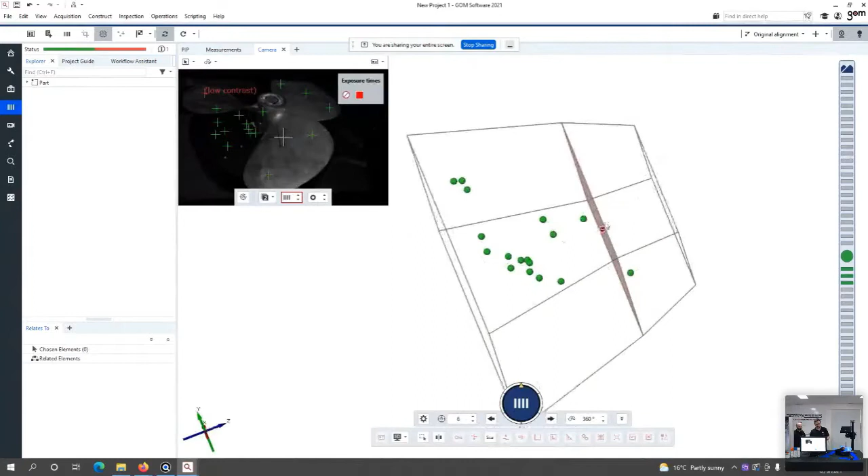Okay, so we can see these green dots within the measurement volume. These are reference points that have been applied to the surface of the component. This will help us keep track of where the measurements are positioned relative to each other. And it will also help us for the second stage of the scanning process, which is marrying the first side to the second side based on the common reference points that we'll be seeing.

Okay. So for the scanning today, we're scanning this propeller. This is a very worn and beaten up propeller. So this is for a maintenance repair application. But what we're really going to be doing with the scan data, once we've created the digital twin, is reverse engineering it and creating a CAD model which is going to be used for production. We'll talk a little bit more about that at the end, but right now we're going to jump straight into it. So within the software here, I've got this workflow assistant.

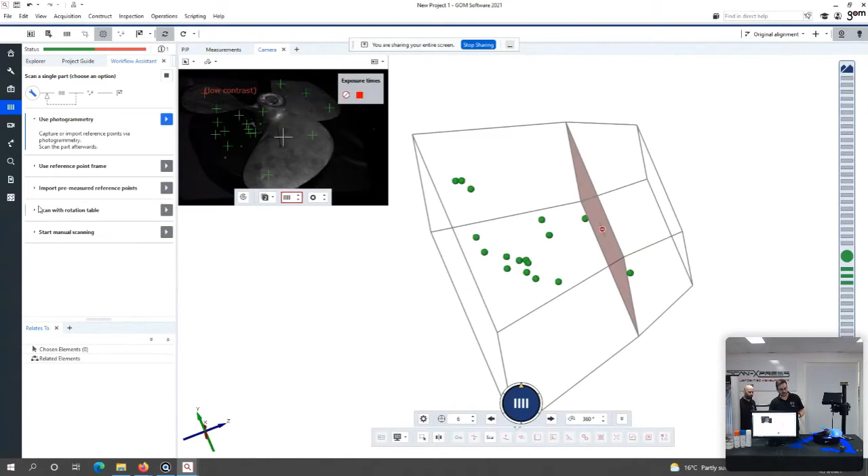And the workflow assistant basically guides us through how to scan if we're a little bit unfamiliar. But I can just start here scanning with rotation table. So I'm going to click that. Choose the measurement temperature. I've got it set to 6 measurement positions, which is good. Yep, perfect. 20 degrees in here. Nice temperature control. Perfect, 20 degrees, that's right.

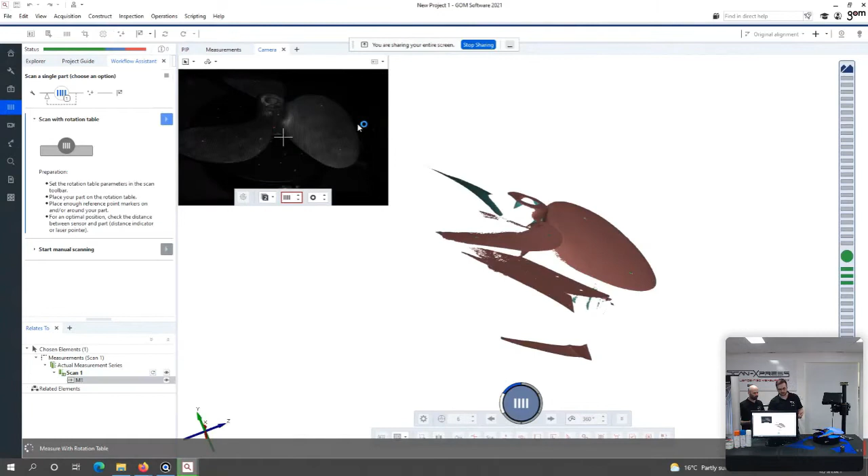Lovely. So what's happening at the moment is the scanner is projecting a pattern across the surface of the part, which the left and right cameras are looking at and triangulating, and this builds up our 3D surface map. So we can see that's the first patch of data that we've collected. The ROT 350, which we've got connected to the computer as well, rotates between each measurement, so that provides a semi-automated setup where we don't actually have to do much intervention. So while that's happening, we can see the data being built up on the screen.

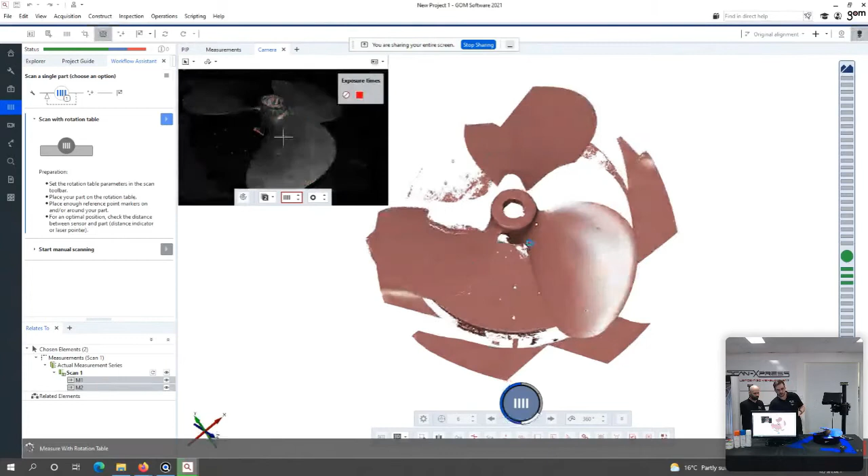What we will have to do after we finish capturing these first 6 measurements is delete the background data. So what we can see at the moment is that the scanner is capturing everything. We can see it's capturing the propeller, which is the region of interest for us. We're also capturing the rotation table, the ROT 350, which is rotating, as well as the background, the table the ROT 350 is sitting on. Okay.

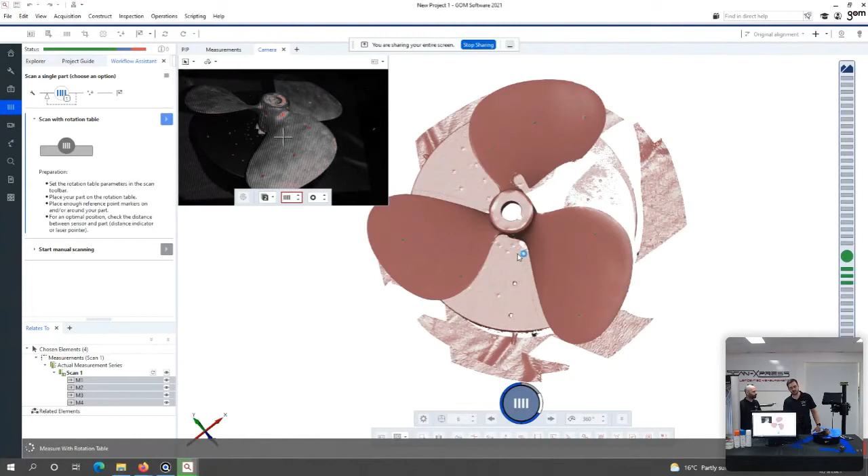But as we mentioned, this is for production application. So we're going to be reverse engineering to create a CAD model. And this CAD model can be read by any manufacturer for any sort of manufacturing application. Could be 3D printed. A little teaser for what's coming up.

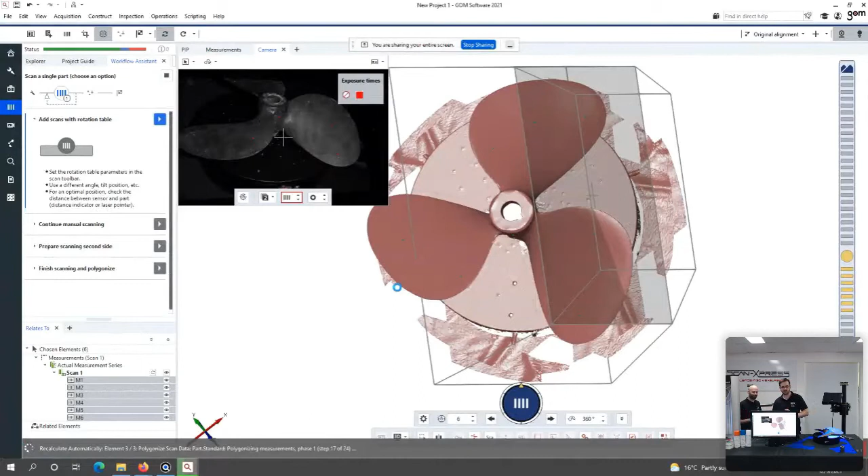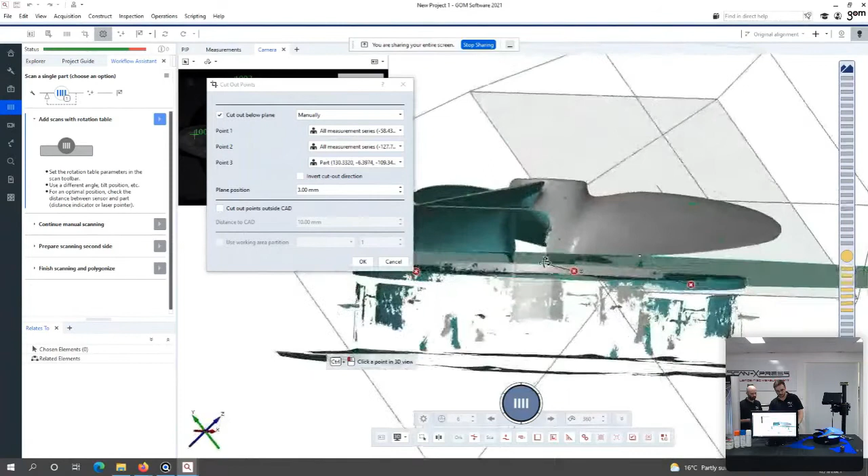Okay, so we can see here we've captured the first set of data from this first side. It's nice clean data. So what we're going to do now is delete the background. So I'm going to come up here and say cut out points. Okay, and I'm going to say cut out below plane. I'm just going to define 3 points in the rotation table to define that plane. We can just have a quick check to make sure that that's good. And looks pretty good. So what we're saying is that anywhere from that plane down, we're not going to accept the data and the measurements that we've just captured. Excellent. So we're going to do that.

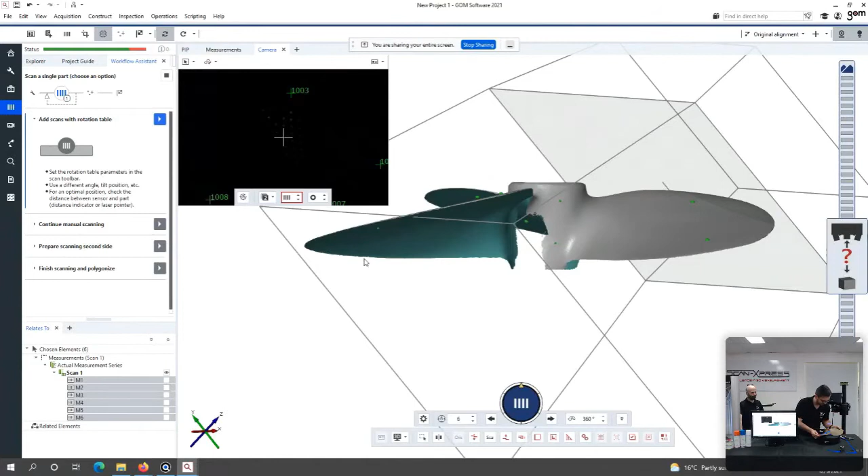Okay, so we finished scanning the first side. So we're going to flip the propeller over, and we're going to continue measuring the other side. Make sure it's in the middle of the rotation table. Again, from the workflow assistant, we see prepare scanning a second side. So we're going to do that. And again, we've got a new measurement series within the software. Okay, so we're going to just click scan again. It's going to repeat that, just collecting data from the other side.

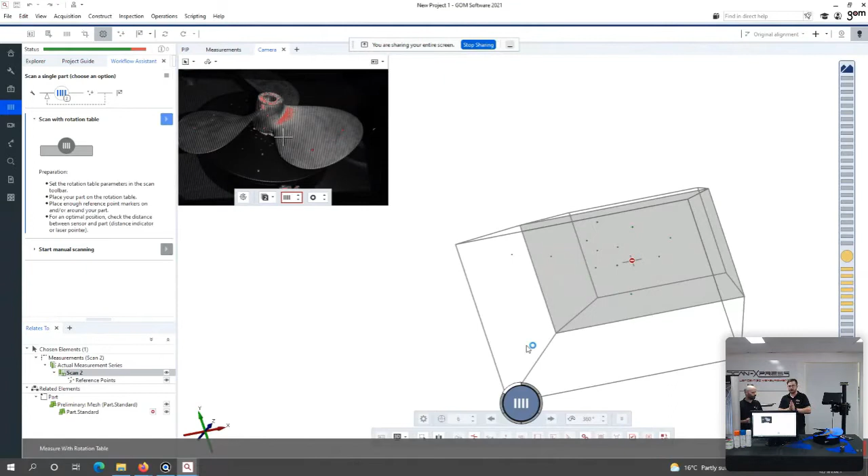So once we've collected all the data and we're happy with the scan data that we've collected, the next step will be taking the scan data out of the GOM software and into a reverse engineering software called Geomagic Design X. And what Geomagic is going to do is it's going to analyze all the scan data, and we're going to be able to segment it into different regions. And then we're going to be able to intersect all the regions and the CAD patches that we've created to build up our ideal CAD model.

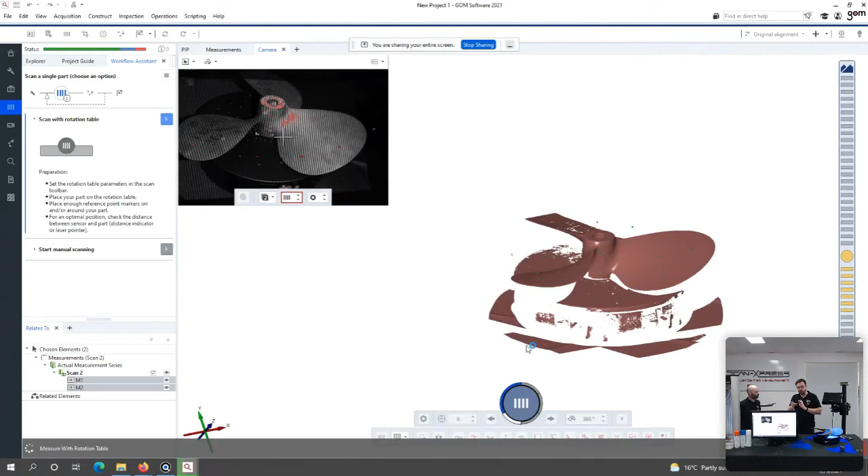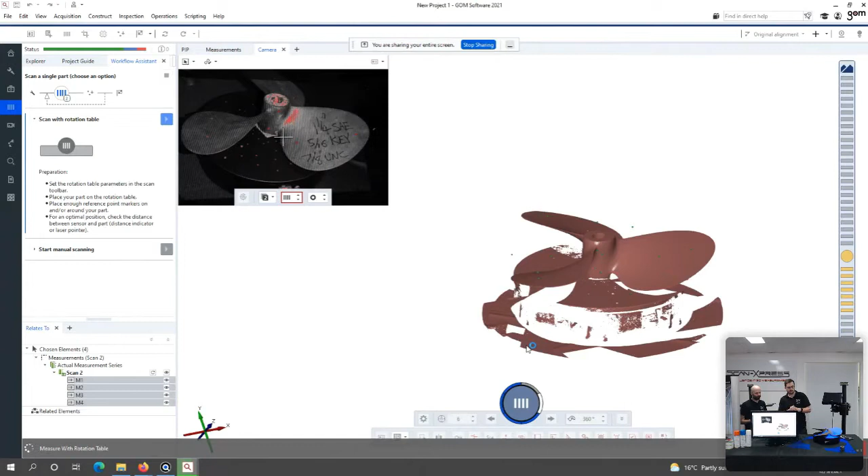The other thing that we can do is we can rotate the blades on top of each other, so we can analyze any defects that might exist locally on one blade that we don't want to recreate in the CAD model, because we want to have a perfect CAD model that doesn't have any defects. We can detect the damage and then analyze the data, reverse engineer it to design intent. Exactly. Get rid of those damaged areas. Exactly. An old propeller like this is going to have a bit of damage, so we want it to be a perfect CAD model.

But yeah, not just for reverse engineering. These scanners are also well built for inspection, which is going to be what Ben's going to be talking about, and he'll be showing us some AESUB scanning spray in that application as well. But we don't need AESUB scanning spray for this propeller because the surface is perfectly matte. So Ben will talk a little bit more about that.

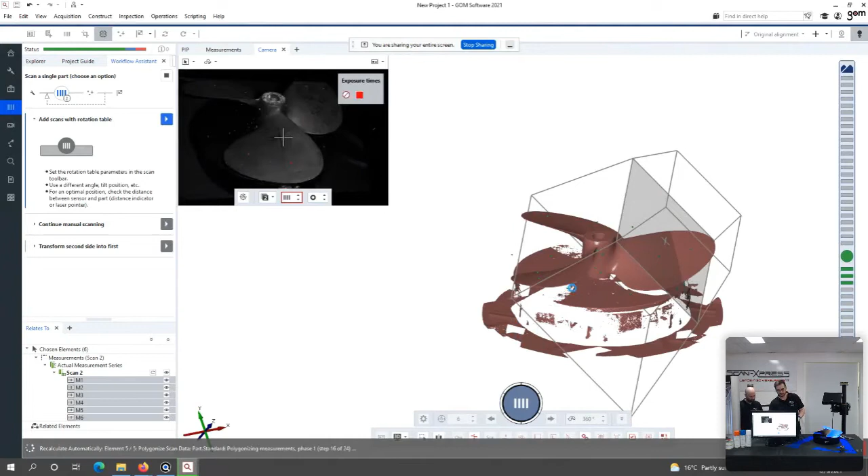Yeah, absolutely. That's great. Okay, so again, we've scanned that side, which we're happy with. We're going to come here to cut out background points again. Let me just make sure I've selected the right thing. Yeah. So 1, 2, 3. Just make sure I'm happy with that. I am. Okay, so again, it's going to delete all that data.

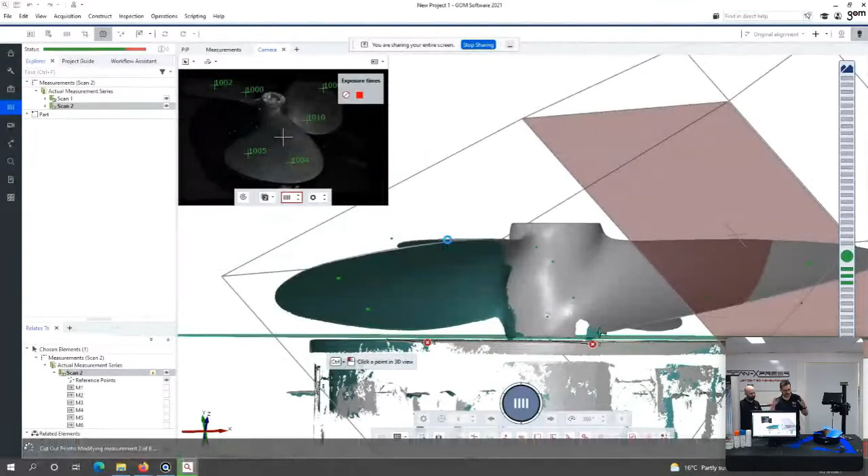So what we've done now is we've scanned one side and we've scanned the other side. But if we were to look in the software, what we can see is that they're sort of on top of each other. They're not really well aligned. So what we need to do now is we need to tell the software to align them together to the same coordinate system. So we're going to click this button here, and it's going to do it based on the common reference points.

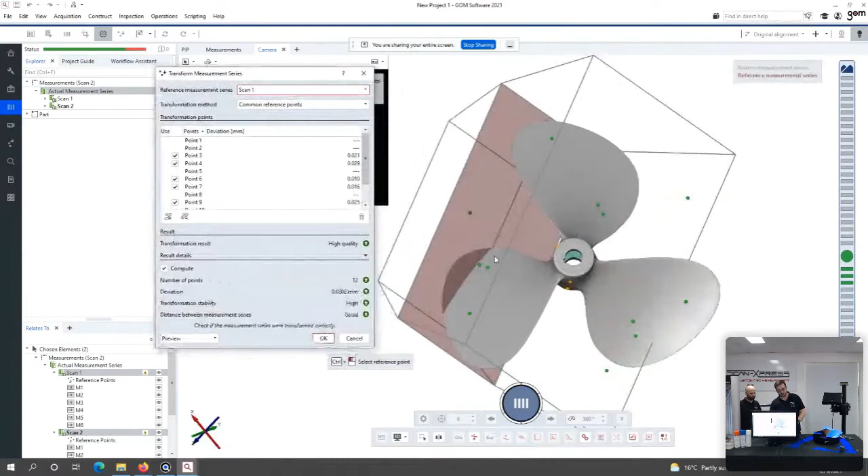Okay, so we can get some quality feedback. We can see that we've got all green ticks. We're happy to do it. We can see these yellow reference points, which are the ones that have been used to do the alignment. We can just have a quick little visual check. It's looking all good. Okay, great.

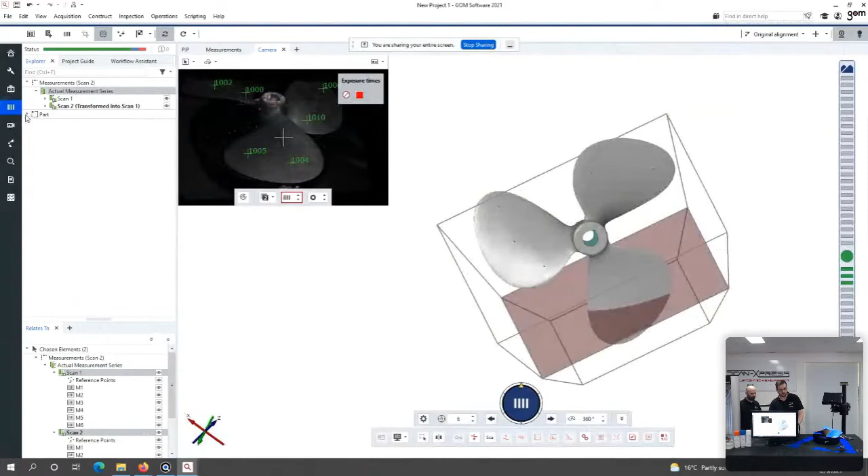So once we've got that, we've got our digital twin. What we can do is we can start doing the reverse engineering. So this is the actual end result. This is the CAD model that we've created. As I mentioned, that was reverse engineered in Geomagic.

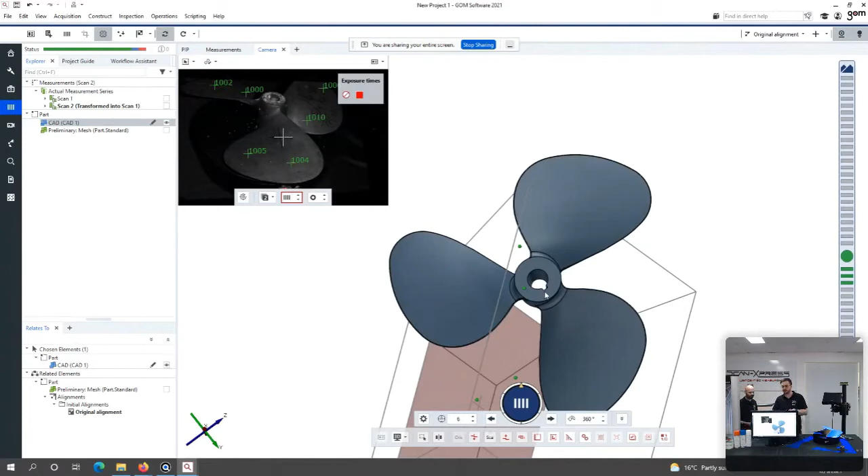And once we've got this CAD model, we can manufacture it any way. We could have it machined by machinists. We could have it cast. We could also have it 3D printed, which is where I'm going to start talking about these 3D printers now. What I will do is stop sharing so hopefully you can see it.

Yeah, this is the WASP 2040. We did actually print a propeller before. We seem to have just misplaced it, so you have to take my word for it that we did print one. Yeah, so this is the WASP 2040. It's so named after its build volume. So it's got a 20 centimeter diameter build plate, but it can print up to 40 centimeters high.

We've got a bigger brother at the back, the WASP 4070. And again, it's got a 40 centimeter diameter build plate and a 70 centimeter high build volume. But there's also a bigger brother of that again, which is a 60100. And again, there's a 3MT above that.

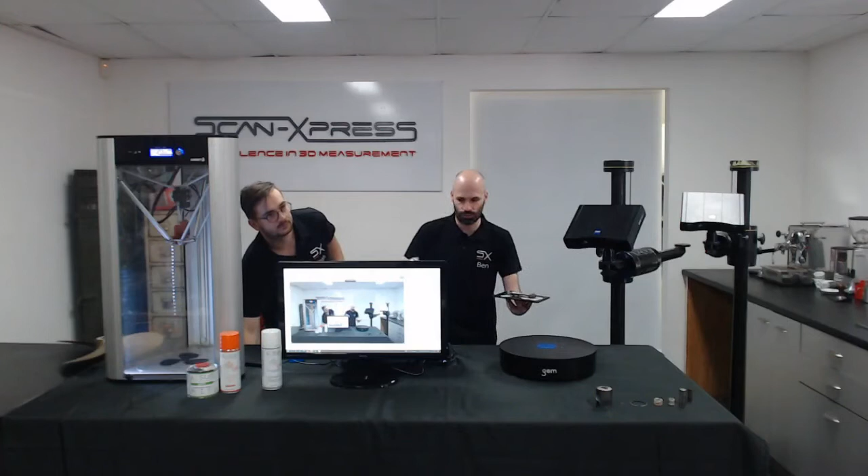So we just spray a bit on here, away from the scanner probably. Over to Josh, here we go. How's it smell, Josh? It smells great. It's lovely. Yeah, excellent. So we don't need too much. And what it does is it covers the surface really well. It's a really well designed spray, so it's a really even finish. So we can reliably approximate how much surface we're adding to it. Yeah, that's great.

So what I'll do now is just place the part smack bang in the center of the rotation table. And what you can see is that projected area. So if you notice on the previous one, the 400, it was quite a large scanning area. This is a much smaller area. So we're concentrating these 5 megapixel cameras just on a much smaller area, so we get higher resolution data. Let's just adjust that. So we've got the sensor right in the middle of the volume. And then we'll jump into the software again and start scanning.

Any concerns of breathing in spray? Absolutely not. It is perfectly safe. It smells wonderful, so no worries about that. We've got the full data sheets, and it is safe. It is free of titanium dioxide, so it's not carcinogenic. We can send you a material safety data sheet afterwards if you want, Guillaume. But it is safe. It's recommended to use it in a ventilated area, so breathing on top of each other is probably not the greatest, but it is safe.

Yeah. And just the other scanning sprays. So the blue that I'm using here dissipates in about an hour to 2 hours. The orange lasts a little bit longer, so we're talking like 12 to 24 hours. So if we're scanning a large component, it's much better to use that because then you're not going to worry about it evaporating off the surface whilst you're scanning. The blue is great for small components we can scan really quickly. The white is permanent, so it doesn't disappear. You just clean it off with a dry rag.

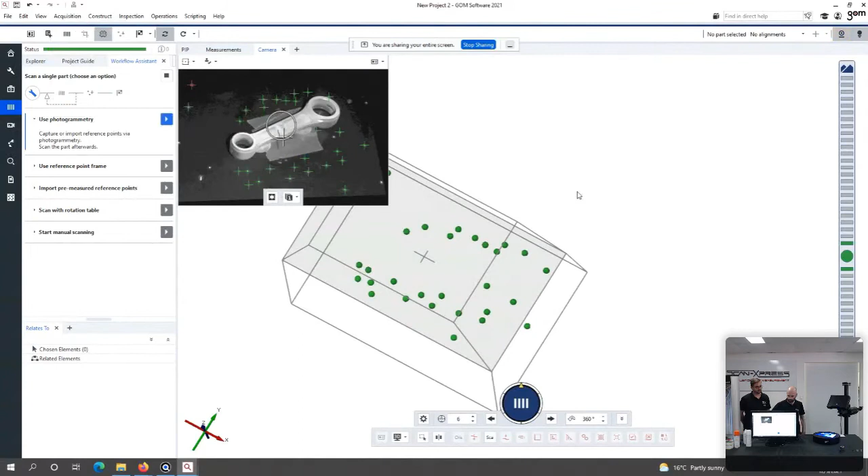So it's automatically identified the scanner. You can see the measurement area there. I'm just going to ignore my warm-up time because we're not worried about that. And we've got the reference points again on that surface. So again, using the workflow system, which is going to scan with rotation table, enter my measurement temperature, and it's going to do everything automatically. Set my exposure times, capture all the reference points, and away we go.

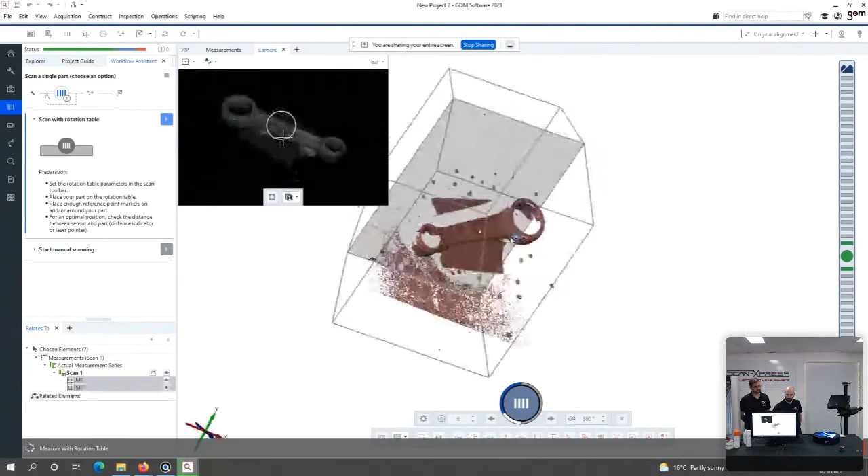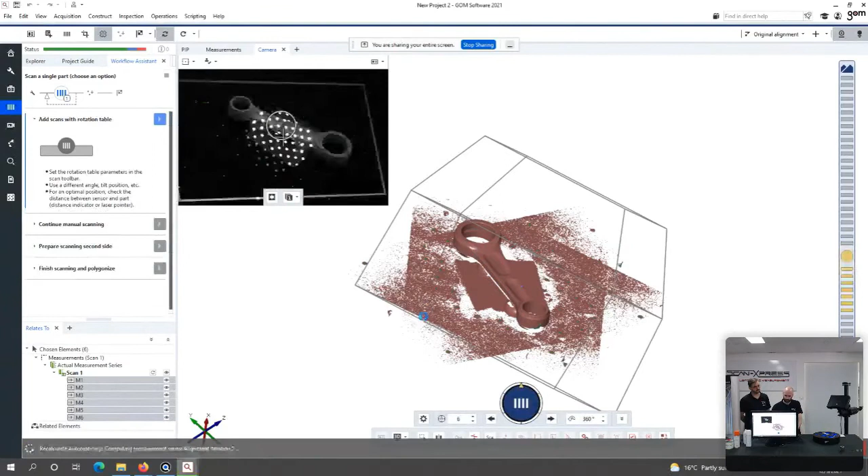Just building up the scan data. As you can see there, nice and quick, really easy to capture some really good quality scan data. Yeah, that's fine. So the next process would be the same as Josh showed you earlier. Scan one side, make sure we get all the different angles, get all the information, flip it over, scan the second side, and marry the two together. Now you've already seen that process, so I'm going to skip straight onto the inspection. But yeah, as you can see, that's the quality of data we can get straight off the bat.

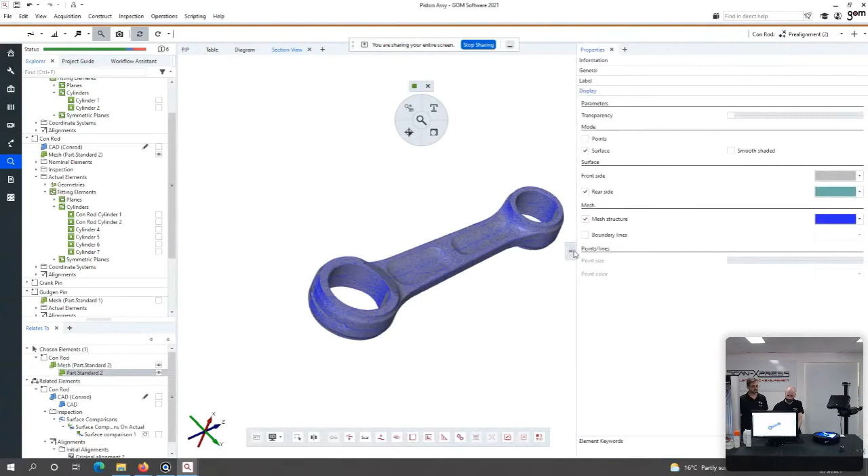So what I'll do is I'll just dive into this project right here. Now this is a bit of scan data that was prepared by Olivia. She did a fantastic job scanning all these components earlier using these very same systems. So this is that full scan of the conrod. What I can show you here is the mesh structure. So what this really shows is the resolution of these systems. So every intersection of a line is a point captured in the space. So we've got, if we can see here in the information tab, just under 500,000 points captured on this conrod using this system. So it's a huge amount of data.

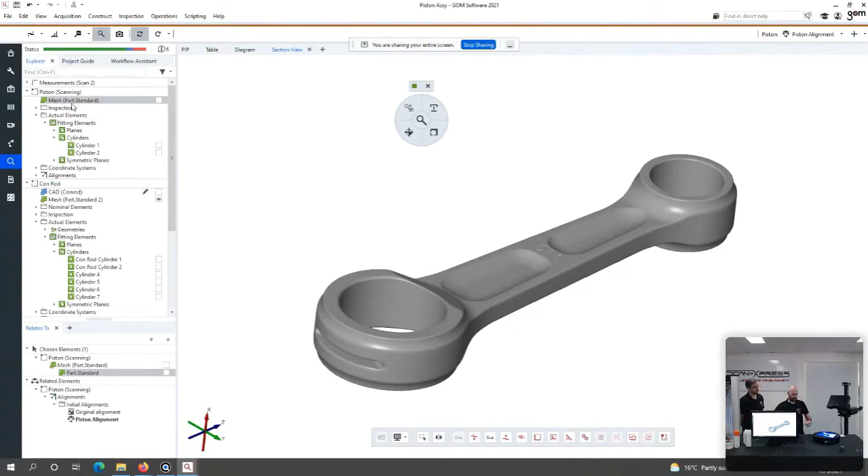Now, the applications for this are similar to the propeller. What we can do is inspect this back to a CAD model. We can create a CAD model, or we can dimensionally inspect the part itself. So what we've got is actually the full assembly of this piston. So you can see here the piston head, and what we've got is a bit of damage here. So maybe what we want to do is inspect this conrod and detect any deviations that might have occurred from that piston. Can we reuse this conrod? So the important things would be maybe the cylinders in the end, the angularity between those, and then looking at maybe an inspection between the assembly itself.

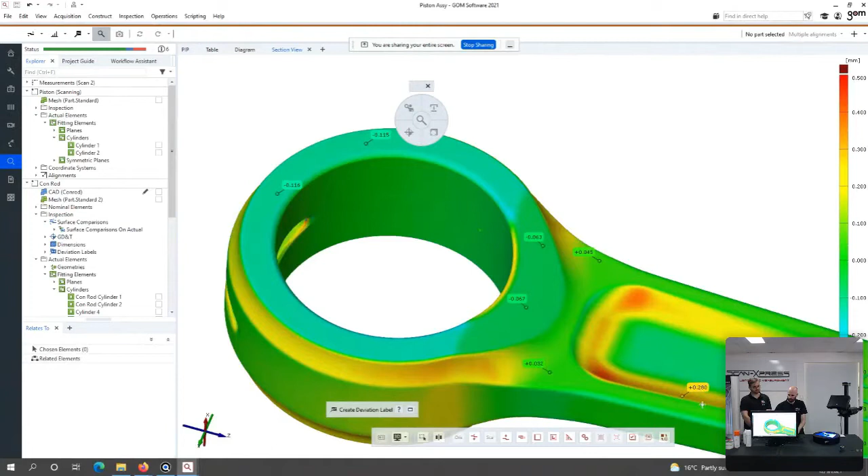So we've got the CAD model here, which is right here. So what we can do is then start doing our dimensional inspection back to our CAD model. So this comes up as a color map. And you see the legend down the right-hand side. What we can do is inspect every area on this conrod back to the CAD model and check all those dimensions there. But this is really just surface deviation. And for this conrod, the main surface is really irrelevant. It's mostly just the bearing faces that are important.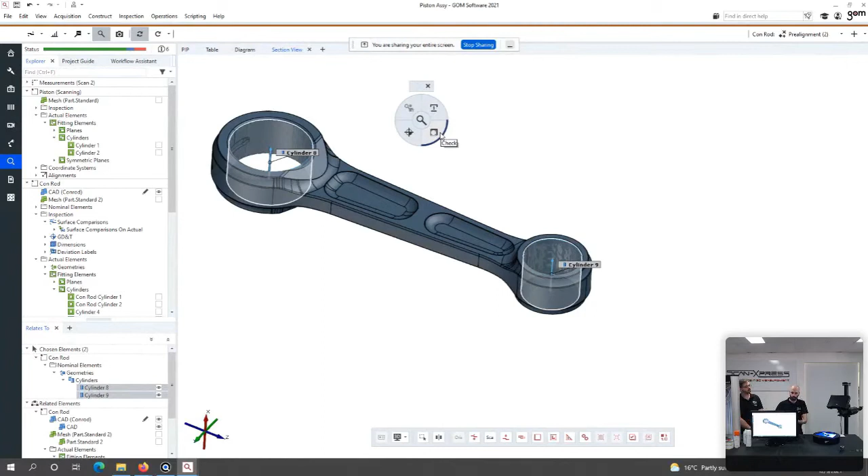So what we can do is create our features on our CAD model. So let's just create a couple of cylinders right here. So I'm just clicking on the surface, and then I'm going to fit those to my scan data. And why we do it on the CAD model is because then we're creating a template. So if we were able to rescan this component, everything here will be remembered. It will remember all these steps I'm doing here. So it would be nice and easy to replicate this.

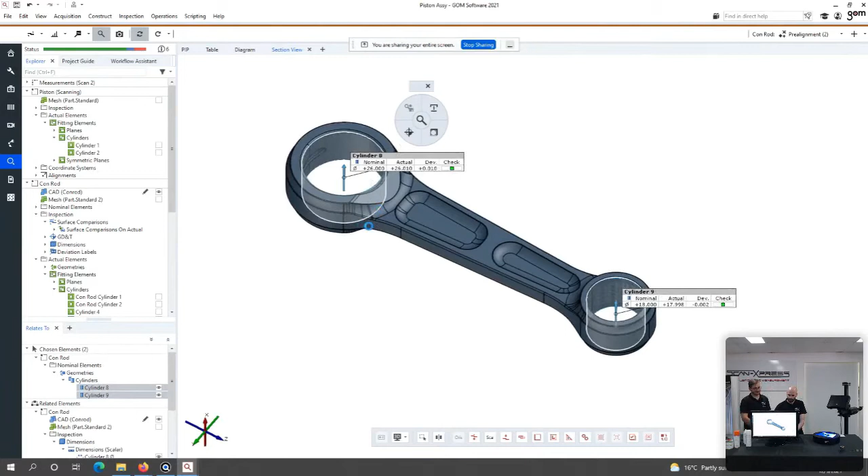So you create your inspection of the CAD model first, and then you recreate the equivalent elements on the scan data, and then you can do the comparison between the two. Exactly. So we create them on the CAD model, and we fit them to the scan data using whatever parameters we want. So as you can see here, we can see the diameters of those two cylinders, which are pukka, absolutely spot on, no worries at all. So then maybe we want to look at some GD&T. So as it does an autosave, maybe we want to look at a roundness check.

So we just do a roundness check again, just straight on those cylinders. This is going to do all of my GD&T calculation. I'll just need to input the tolerance, which is right here. So 0.1 mil is absolutely fine, and we can see those references there.

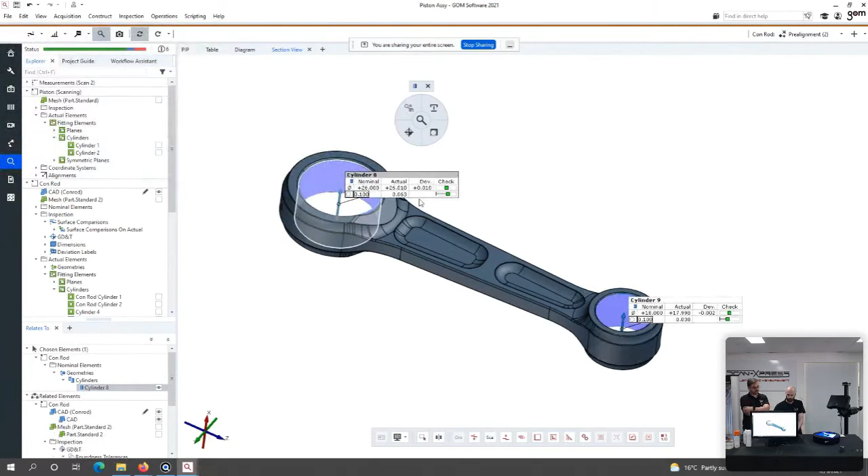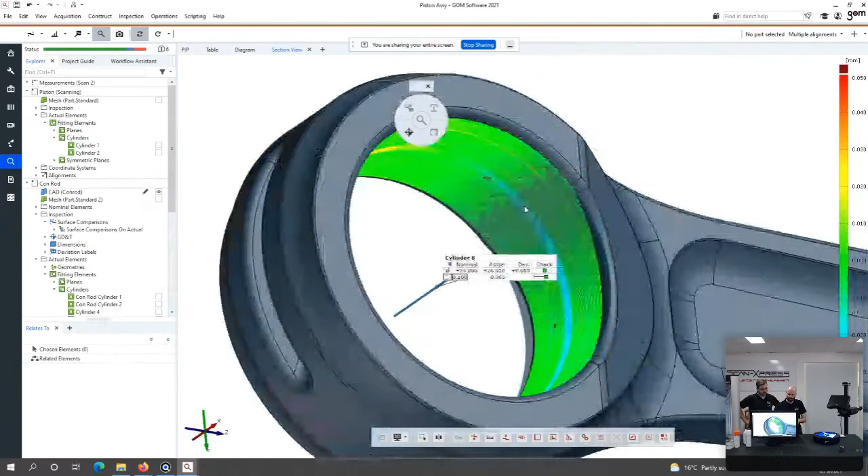The thing with this GOM system though is because we capture so much data, we can go a lot further with the inspection than just looking at this one-digit answer. So what we can do is flick on this color deviation representation and maybe change our color band down to 50 microns. Now what this is going to show is a much more detailed understanding of what's going on within these cylinders. So this is looking at that GD&T feature itself and then projecting that back onto the scan data. So what we can do is inspect every single feature on here and how that's affected by this roundness check.

Okay. So you can see these score marks and these deviations. Now these are much smaller. I've had to change that color band on the right-hand side to find those. Yeah. This is where we can start looking at part wear, maybe a part life cycle, maybe tool life over time. We can analyze those parts that it produced. Okay. So we couldn't see that when we just did the color map back to the CAD model.

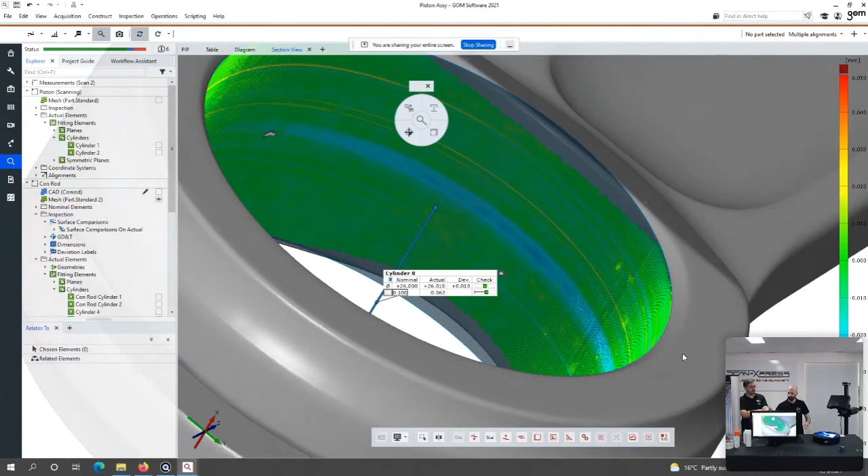Yeah. Okay, but we can see it when we do the comparison of the surface back to the roundness check itself. Exactly, because this is not looking at deviation from the scan data back to the CAD model. Okay. That's just looking at linear deviations. This is looking at the roundness and how that roundness is affected inside the cylinder. Okay. So that means we can do the inspection without the CAD model. Exactly that. Yes, okay. We can do both.

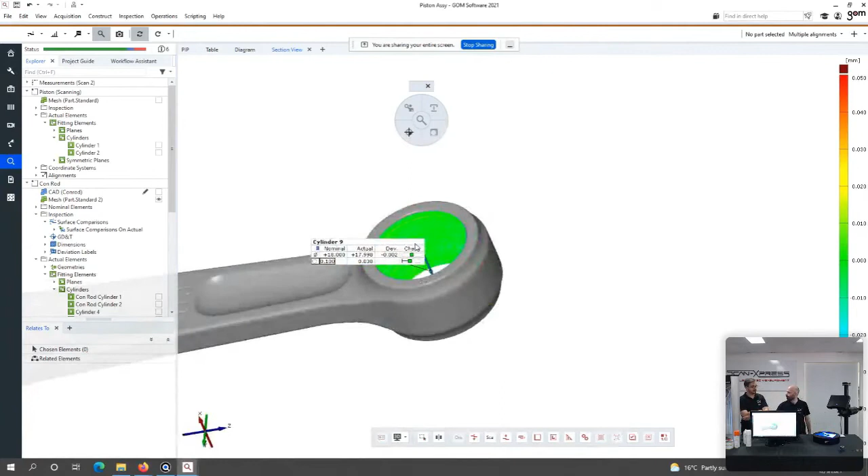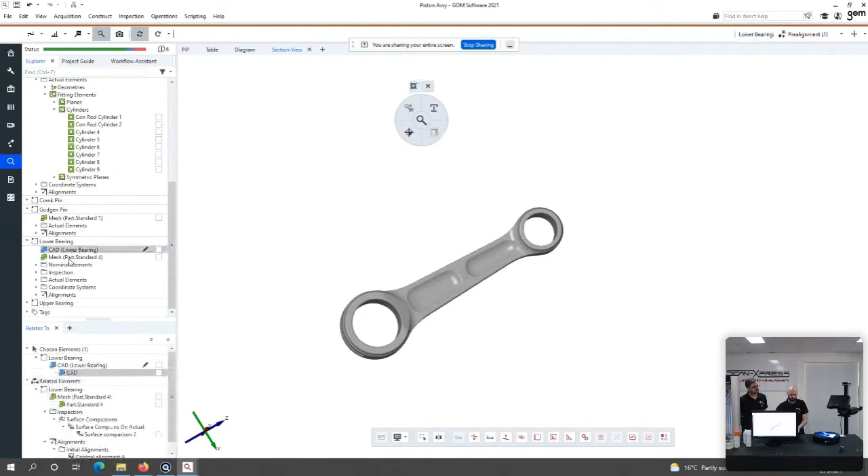Great. So another thing we've done is this digital assembly. So this is called a parts project, and you can see down the left-hand side, we've got these different areas of the Explorer view for these different parts. So I've got the piston right here, we've got the conrod, and we've also got the gudgeon pin, the crank pin, the bearings, and things like that. They're all in this one same project. What that means is we can do individual alignments and individual inspections on different parts of the assembly.

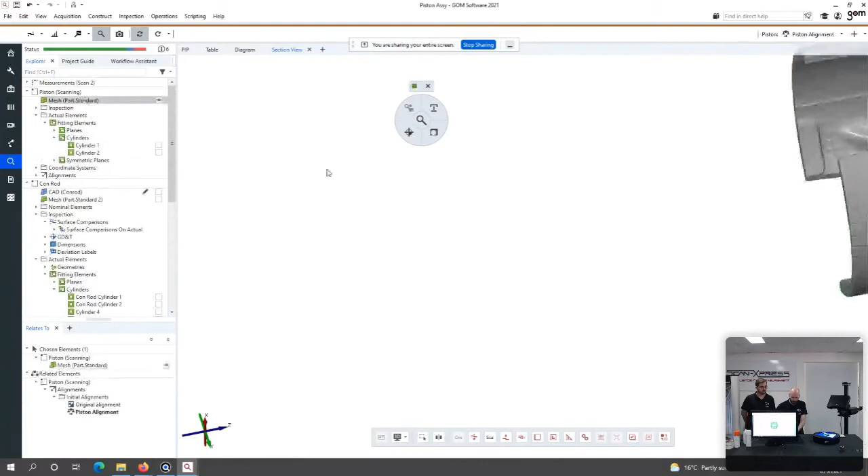So for example, we've got the lower bearing here. We can do a color map inspection on that lower bearing. But then what we can also do is align that back into my conrod and see how it's affected there. Other things we might want to try is if we look at our piston, maybe we've got the cylinders here for the gudgeon pin, and we want to see a concentricity check from that against our conrod. So if I find the right cylinder, we can have a look here, just to slow us down.

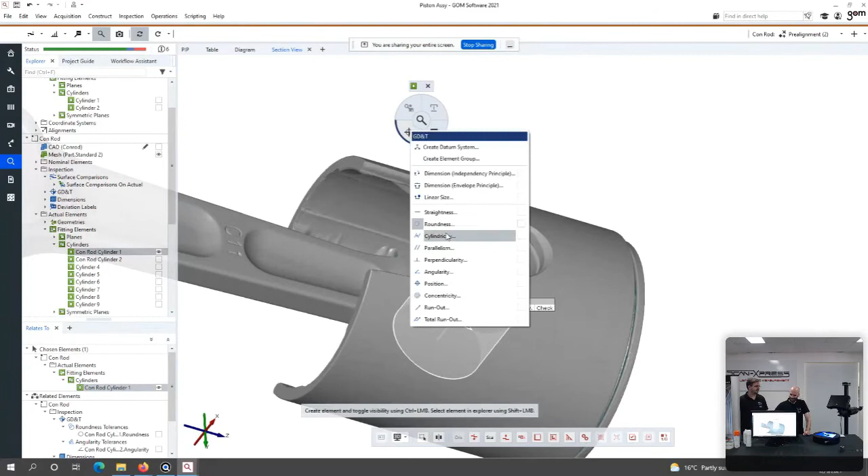So if we just do a concentricity check, select my datum system, which we've already prepared, which is this piston datum here, and then we can check that deviation as a concentricity from the conrod back into the piston. So we can do these multi-part assemblies and multi-part analysis.

Yeah. An excellent application for this may be looking at a plastic injection molding tool. What we want to do is check this as an assembled component and see how those mating faces are going to affect when the part is assembled. We can't physically see that when we're capturing that data. So look at any interference of those two faces. But yeah, that is a very brief overview of the GOM Scan 1.

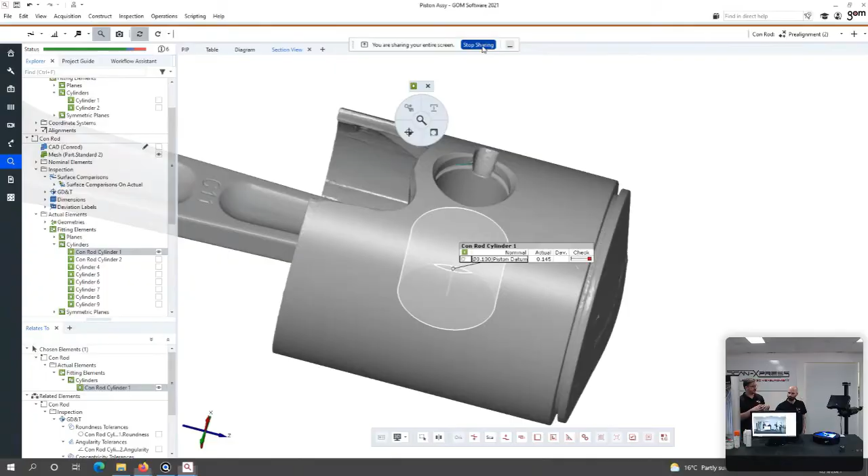Yeah. I think I've rocketed through my part a bit quicker than I was expecting, but maybe we'll dive in and see any questions, and we've got some other demo material we can look at as well. Yeah. So that was actually doing comparison between parts. That was awesome. Thank you. Really cool.

Yeah, it is. It's a great scanning system, and really adaptable. As I said, we can just plug and play these different measuring volumes depending on these different parts. So if we've got a large block, we can just throw in the GOM Scan 1 400, scan at a larger volume, and then if we want that high resolution, that really fine detail, all that additional accuracy that we can get with the smaller measuring volumes, we can go for the 200 or the 100.

Yeah. So we've shown today the 200 and the 400, but as Ben said, there's a smaller one, the 100 volume. But yeah, we have done that a bit quicker than what we anticipated.

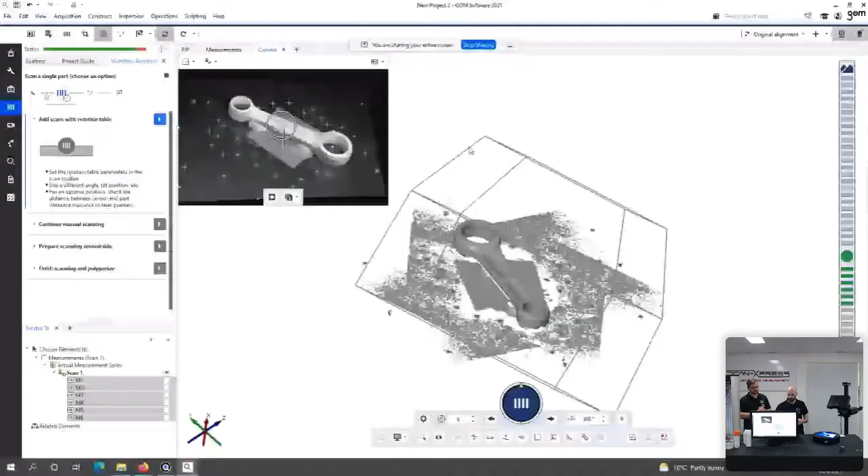Well, maybe I'll dive back into the software. I'll show you some other inspection features, and if any questions come through, maybe Matt can just shout them out so we can see them. So let me reshare that, because the inspection software is phenomenal. There's so many different features that we can use to get a really full understanding of the part. So we've already had a look at the conrod here.

We've inspected the diameters. So using that as well as using these color maps, and using the two together to get full understanding of the part. How that compares back to a CAD model, but also the dimensions of that part itself.

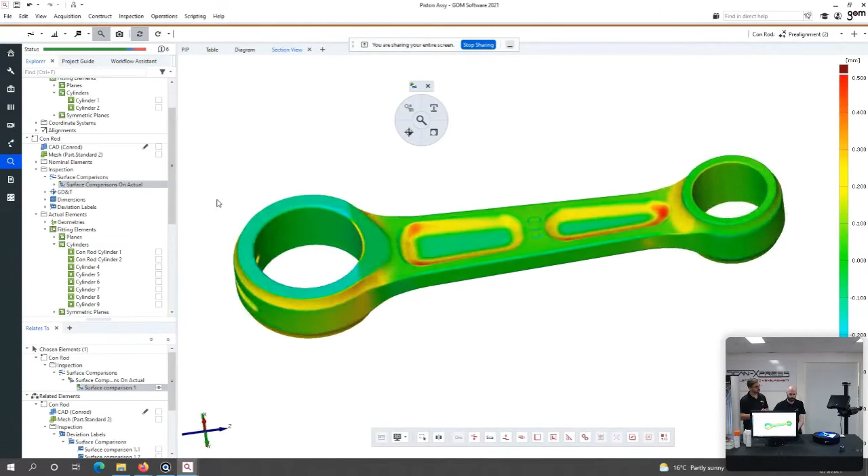What we can also do is multiple alignments. So at the moment, we're just working in a pre-alignment, which is basically just a global best fit. It just puts the two parts close together, and that's really used for getting an initial understanding of the part. Are we close? Do we need to carry on with the inspection, or can we just scrap the part and get rid of it straight away? But once we've done that, then we can do some better alignments.

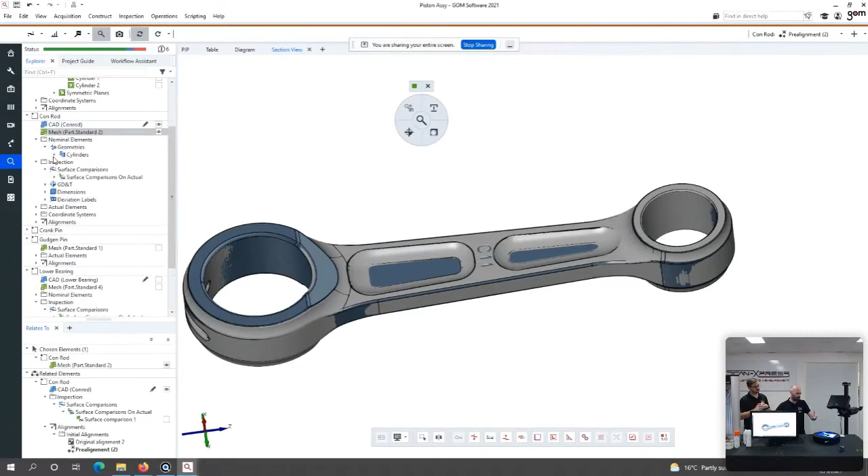Maybe we're aligning back to a drawing, or aligning back to an actual datum system.

We've got a couple of questions, guys. Ben, what is the resolution achievable with each system? Luckily, Josh here is the master. Am I? Hit me up, Josh. Yeah, I actually only know one of them off the top of my head.

The GOM Scan 100 volume is 37 microns. The others are more than that. I believe the GOM Scan 400 is somewhere around that 40 to 50 micron range, 44 maybe. And I think the GOM Scan 200 is somewhere in between. If only you had a spreadsheet. If only I had the spreadsheet. We will get back to you with that. The technical specs will be available on the website.

But essentially, the larger the measuring volume, the larger the point spacing, so the larger the resolution. So if you really need fine resolution, you go for the smaller measuring volume. So the parts that you've got down the front here, like the lower bearings and things like that, will need either the 200 or the 100 to get this fine detail on these really small components. It's about 15 mil in diameter or something like that.

Yeah, exactly. The other question we have is by Bo, what is the maximum scanning size? Sure. So to be honest, we can tile these measuring volumes. So essentially, you can scan a part of any size, but that doesn't mean that you're going to want to. We've got the GOM Scan 400 right here. So we can capture that 400 mil area and just tile that to capture a much larger part.

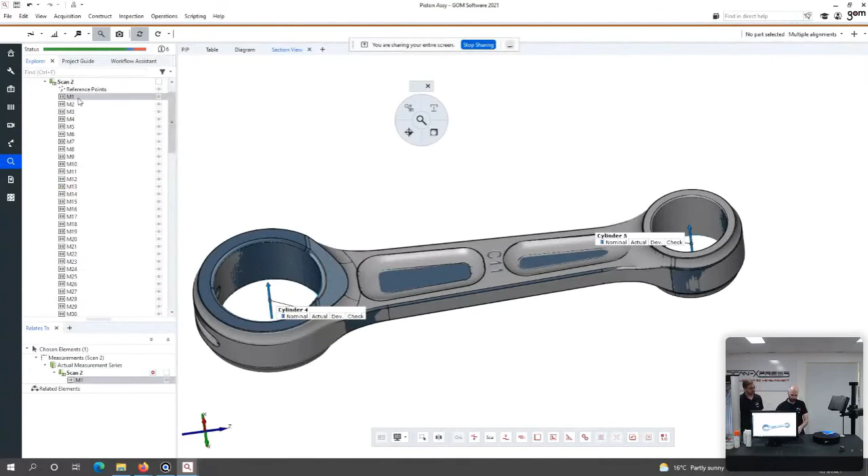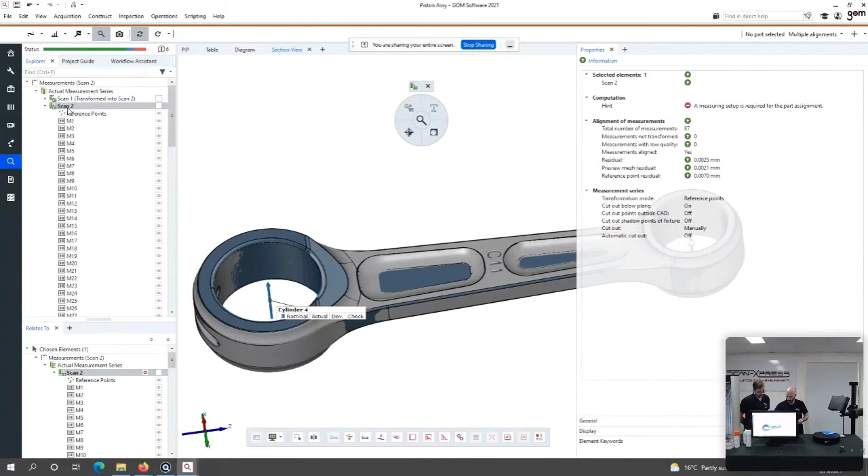So for the benefit of those who can't see the screen at the moment, just to give us some kind of numerical value. Yeah, sure. So the transformation deviation for this one scan is 4 microns, and then 3 microns, 3 microns, 3 microns. So this is all the individual deviation for that individual scan. Now, once we've completed that full scan, we get an overall residual for that full measurement series, in this case 2.5 microns. So that's for this whole section of that scan, in this case this piston, looking at this top side of it.

And we've got the two sides, so we've got 2.5 microns on either side, and then we transform both of those together using the process that Josh showed earlier, using common reference points on the side. But using these transformations and these residuals, we can get an understanding of the kind of accuracies that we can hit. So in this case, any residual over maybe 20 microns, we'd be concerned. With 2.5 microns, we're very confident that we're capturing good, accurate data. 2.5 microns, what's the size of that?

Is it? Sorry. What's the actual size? Smallest. Yes, this is this small piston right here. Yeah. And that's for the GOM Scan 100, the smallest measurement volume.

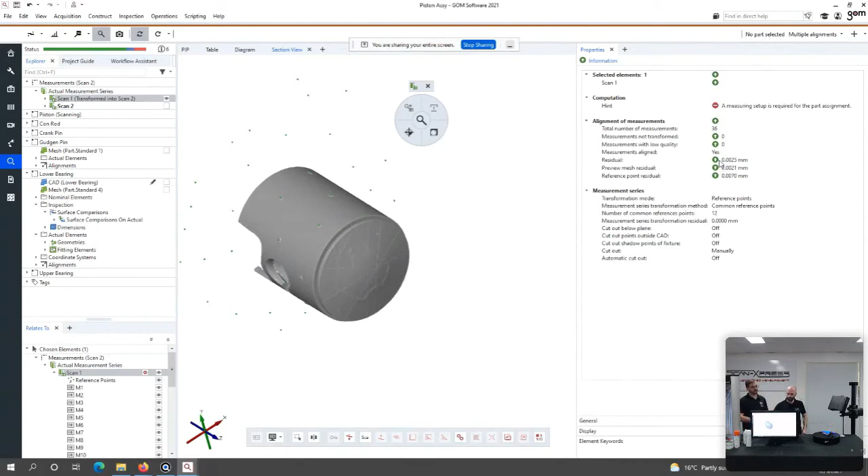But the other thing we get with the capture is actually all of the measurement images are captured and held within the software. So that's right here. So these are all the actual live images from the capture. So we can look at those images. We can maybe use this to identify any serial numbers or look at how the part was set up.

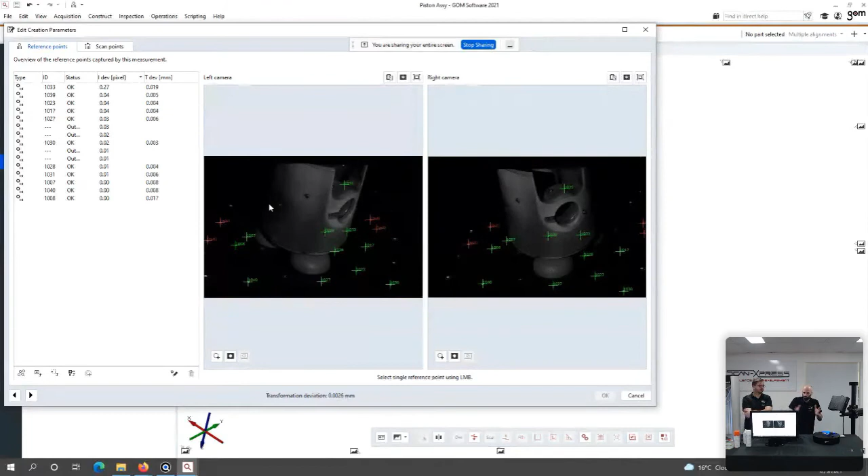We can also look at the individual reference points captured on each one of those images and the deviations associated with them. So let's say something's moved. We can go back in here and find out what's moved, eliminate those reference points, and still get the same accuracies, even though we can maybe have a slight transformation deviation. We can go back and do all this analysis. And this is held within the software forever. All of this information is always available.

So, in 6 months' time, maybe you get an error. Someone's identified a defect. We can go back and look at exactly how that part was set up. If it was a sheet metal part, we can check all the clamps were engaged on the fixture and those kind of things. But yeah, all of that kind of information is held within the project as standard, and that goes for this scanning system, but any scanning system that GOM make.

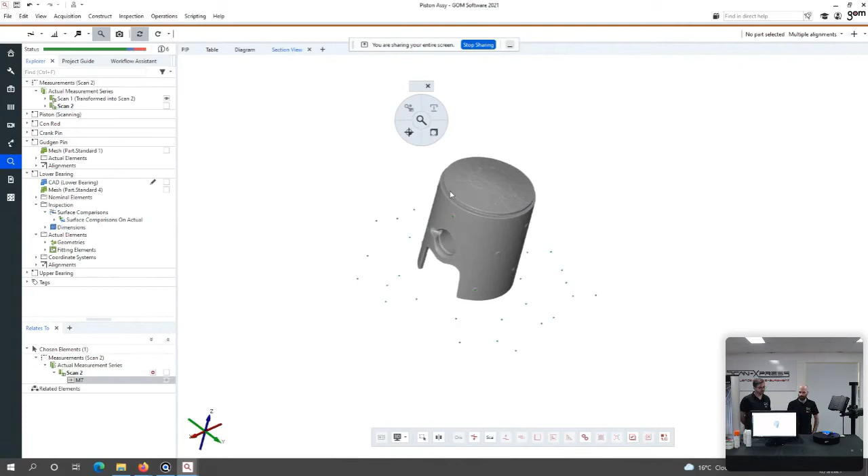Yeah. We have another question from Lachlan. So highly detailed part scans without a problem? Yeah, absolutely. It's just selecting the right scanning system. So if you need that detail, we select a smaller measuring volume that's going to capture enough detail on that small feature. Yeah, exactly. You're matching the system to the application, or matching the measurement volume to the application.

If you've got high detailed parts, then we'll take a look at that and discuss together which system is best. But suffice to say, the smaller the measurement volume, the more detail, the more resolution you're going to capture. Yeah, excellent.

I think that's it. Russ hasn't given us another update. No, they're probably on that. Probably no wickets though.

Probably just one more question. Yes. The system needs to be calibrated. Is that automatic? It's a great question. Carry on, you answer that. Okay. So the system does need to be calibrated, correct. All the systems are shipped with a calibration plate that comes with the system. And essentially it only takes 5-10 minutes at the start.

Essentially all you need to do is move the scanner through a series of positions relative to the plate, and then the software will remember that configuration, the relative positions and angles of the cameras. This is the calibration plate. For those that can't quite see that, there's a series of black ellipses which have been etched onto the surface. So we've got a different one of these for each measuring volume.

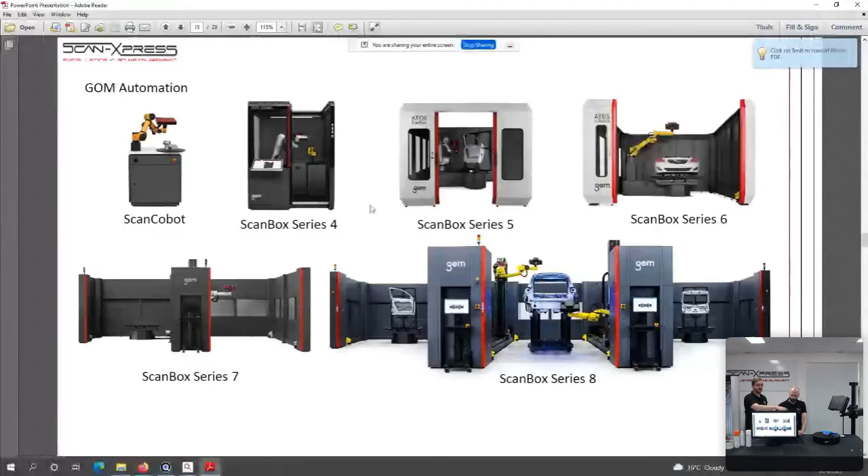It's mainly used for series production. So you're a manufacturer that's producing a lot of components, and you want to measure a lot of them. 3D scanning in this sort of sense could be a bit slower, but you need to set up the scanning so it happens a lot faster. So what you do is you invest in a robot, and the scanner sits on the end of that robot, and the robot takes less than 5 minutes, 3 minutes sometimes, to measure an entire component, generally pretty complex components.

And then because the software is also automated, once you've collected the scan data automatically with your robot, the software automatically generates all of your inspection results. So within a couple of minutes of loading your part into the scan box, as we call them, you've automatically got a green tick for pass or a no, not ready to go.

Yeah, exactly. So this is the full range of the scan boxes, and they're all supplied by GOM as a complete inspection cell. So we've got the robot, the sensor, and the housing, and everything comes in as a complete package. That means we can get them installed and up and running very quickly. And because it's uniform, it's the same scan boxes all around the world, so the interaction between the hardware and the software is very good.

The main difference between all these scan boxes is simply the size of the part we fit on them. So the Cobot and the Series 4, which are in the top left, can fit parts up to around 500 mil, and then with the larger ones, we can fully automate anything up to 10 meters long. The process of programming these automated systems is again all done with the GOM software. So if we've got a CAD model, we load that into this virtual environment. It's called the virtual measuring room. And then the system will position the sensor in the right place to capture the highest quality data, all automatically.

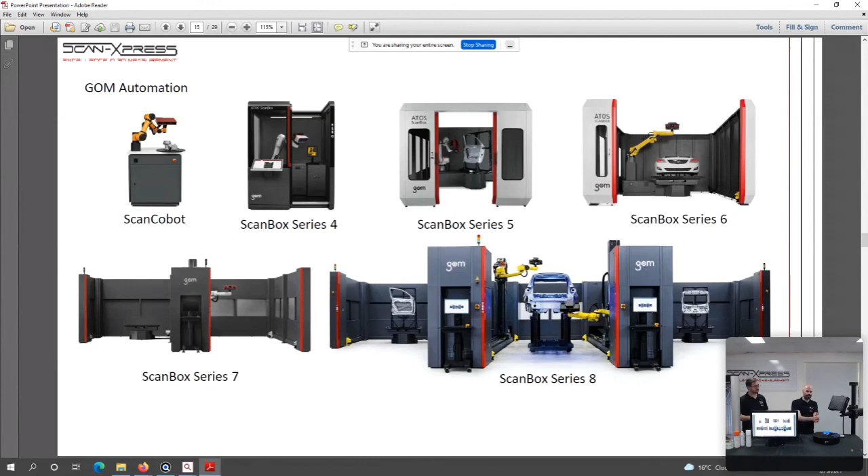So usually, for time saving, if we're comparing from a CMM to a manual system, we'd probably save around 50% of the time. And then if we look at automating that, we'd save another 50%. So it's significantly faster than scanning it manually, but also we get incredible accuracies. We can hit phenomenal accuracies with these automated systems. One of the biggest considerations is the position of the sensor to capture that data. And if we can position that sensor in exactly the same place every single time, then we can get accuracies of single-digit microns without too much consideration.

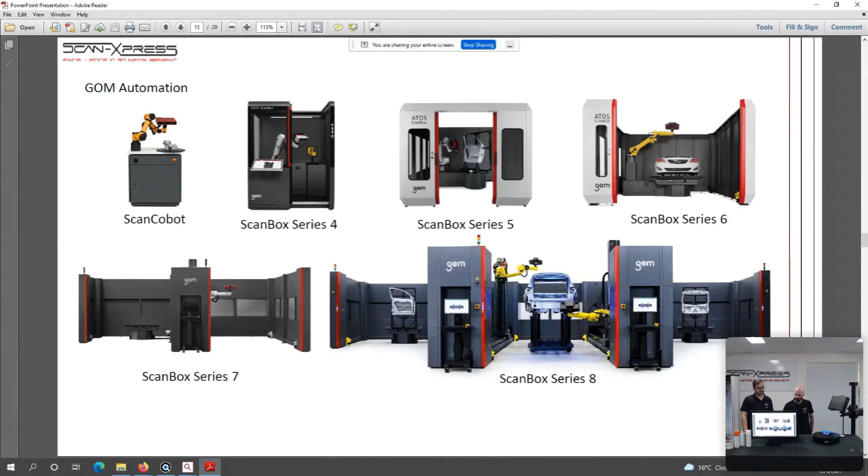Okay. Have we got any more questions? Any more updates on cricket? We've got Aman saying the Hands-on Metrology website would be a nice resource to mention.

So just the question, so you don't have to recalibrate every time you move the sensor? Absolutely not. And the system actually tells us when we need to recalibrate. It comes up with a warning saying if it is decalibrated, that you need to recalibrate. And that is the process that we showed you earlier of measuring that panel. But it doesn't have to be done every time. And especially these kinds of systems that are fixed measuring volume, there's not much that can go wrong with them. And like Josh says, as long as they don't lose the cricket and someone gets angry with it, they're not going to decalibrate very easily. And if it does, it comes up with a message, takes 5 minutes, you recalibrate and you keep on scanning.